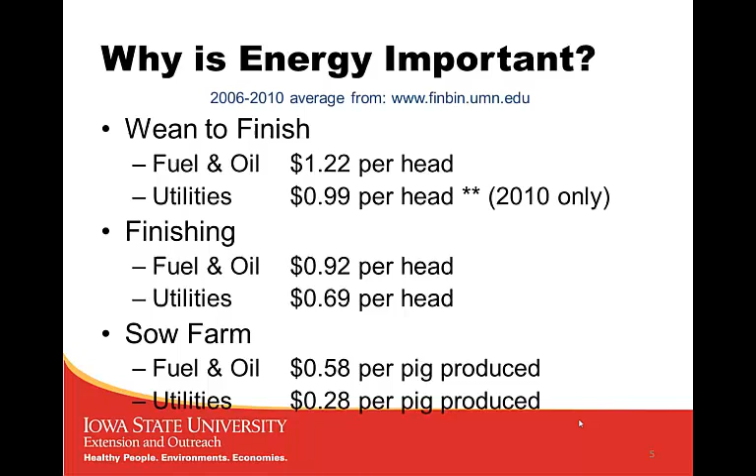So those numbers sound pretty small. So what's the big deal? Well, if you start to think about it in terms of what you can do something about, for instance, in a wean to finish, the energy or utilities is about $2.21 per pig. Well, that's only 2.3% of the total expenses, but it's 8% of the non-feed expenses. And so you get to thinking about it, and non-feed, well, feed is something you can't do a lot about. I mean, you need feed. You can't just say, well, I'm going to save money, I'm going to cut back how much I feed them. And so maybe we look at it from that aspect. That also maybe is a better situation for contract producers. You kind of see where that fits in with what you're paying for.

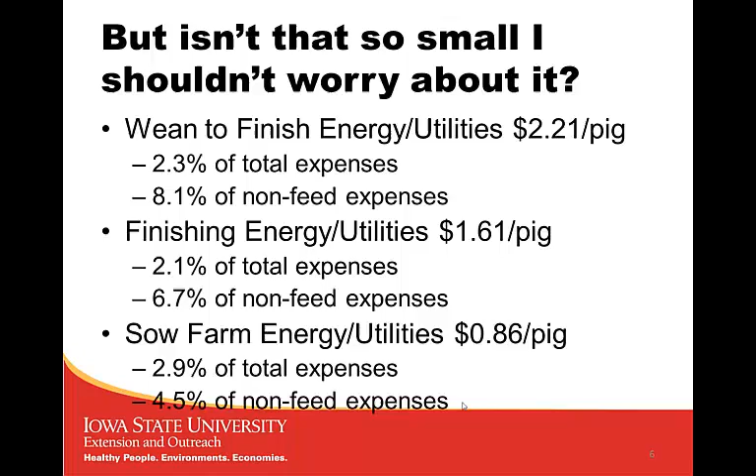And so, it's a significant amount, and it's something that you can do something about. And so, 8% for wean to finish. Sow farm is only 4.5% of the non-feed expenses, but it's still something that we can influence. It's money that we're losing out of our pocket. So let's take advantage of that and do the best we can to conserve it. So, like I said, it's something you can do something about, and many times there are energy savings things that we can do that don't really cost us anything. There's no investment, so that means the payback, rather than 2 years, is essentially instantaneous, and so they're more management related. So I'll try to cover several of those today.

So if we look at annual benchmarks, if you're going to know when you're saving energy, you really need to know how much you're using. So if you're not currently tracking your energy usage, I'd urge you to do that. These are Iowa numbers, and so your numbers will be a little different because your climate's different than what we have here in Iowa. For sow farms, and some of these come from Missouri as well, they were using 240 to 300 kilowatt hours per sow per year. LP, they were using 2 to 3 gallons per sow. Wean to finish, they vary a lot. If it's a tunnel building, 25 to 30 kilowatt hours per pig space per year, and that's per pig space rather than pig finished. For a tunnel versus a little lower for a curtain. You may be a little higher than that because your ventilation system operates at a higher level, probably more hours during the year.

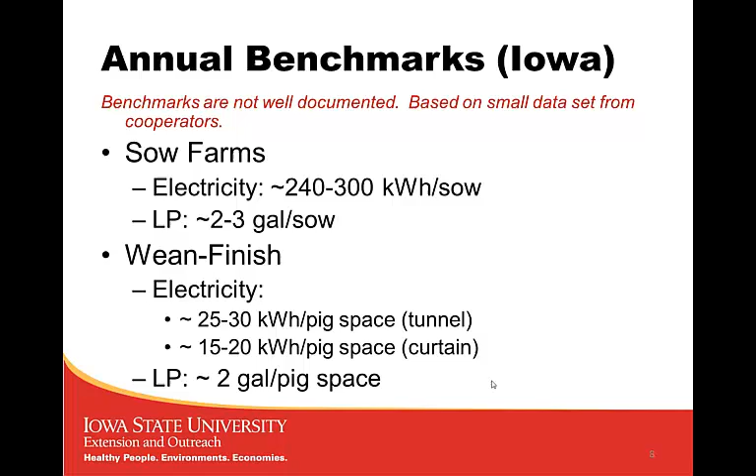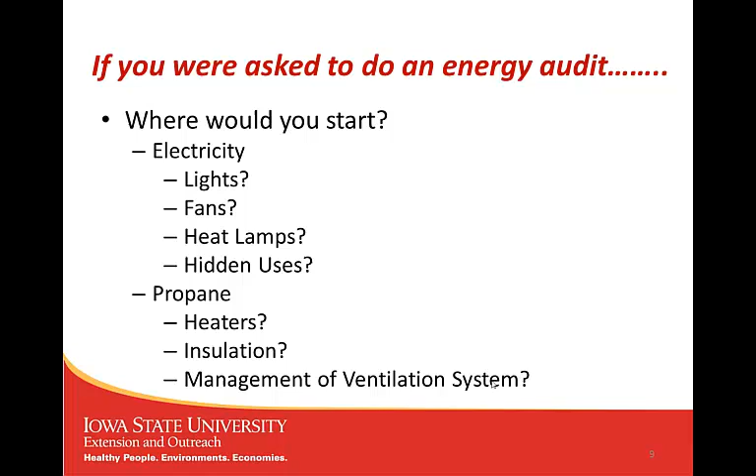So if you were asked to do an energy audit of your facilities, where would you start? Well, with electricity, you think about lights, you think about fans, heat lamps. What about some other hidden uses? With propane, you think about heaters. What about insulation or just management of the ventilation system? And so all these things are things we can think about, but where do we start? Well, I'm going to try to touch on most of these today, and so we can kind of get a feel for what kind of magnitude they have and how important they are.

So let's start with insulation. Many people in their homes, if you have an energy audit in your home, a lot of times they'll focus on how much insulation you have in your attic, and is that appropriate for livestock? Well, most of the time, in fact, we lose 80 to 90% of our energy through ventilation. In your home, you're not really ventilating, and so insulation really helps reduce the total heat loss.

So we have to remember, with our livestock building, we're ventilating, we're losing a lot of heat through ventilation, and insulation only treats the wall portion of that. So we're really only treating that 10 to 20, maybe 30% of our heat loss, and so it's not quite as clear cut. And so what I've done, I've used weather data from Richmond, Virginia.

They have weather data that tells me how many hours is typical between 5-degree increments. For instance, between 85 and 90 degrees, how many hours per year is it typical that the temperature's within that range? And then I go through this exercise where I try to find kind of an average usage, and I end up using 50-pound pigs at 3 cubic feet per minute ventilation rate.

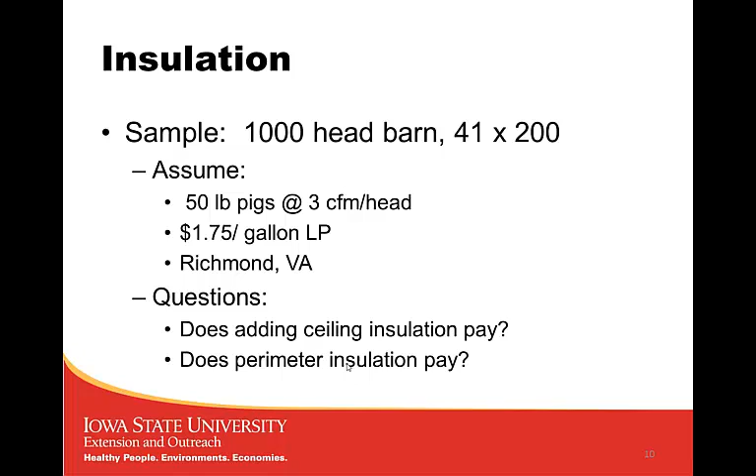So I go through this to find out how much insulation we would really need, or what the payback would be if we made some changes. Okay, and I used $1.75 a gallon for LP. I'm not sure what it is right now, but at the time that I put this together, that was pretty close.

So in this chart, in the left-hand column here, you see it says current insulation depth. So if you think about your attic in your barn, how deep is the insulation? Is it only 2 inches, or do you have 6 or 8 inches? Okay, so that's what this column represents. The center column then is if we decided to add 6 inches of insulation, so we blew in 6 more inches, what would be the savings per year?

And you can see that if we only started with 2 inches, we add 6 inches, so now we have 8 inches, there's a pretty good savings. However, the better insulated you are, the less the payback is. So it's sort of a diminishing return. And you can see here's the payback. This is based on some numbers I had for what it costs to blow in insulation. Maybe off a little bit, but you can at least see what the magnitude change is.

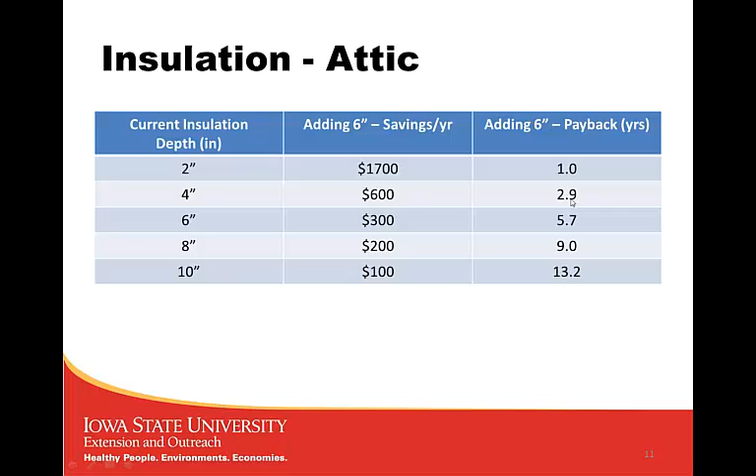And so what you see is that if you only have 2 inches to start with, within a year you can pay it back just with LP savings. But if you have 4 inches, it's going to take you 3 years, and so forth. And so if your existing building has less than 4 inches, maybe it's justified to put more insulation in. It would help building longevity and so forth.

But insulation is not usually the first place we start with our concern, like it would be with a house. And so I wanted to contrast that a little bit, because a lot of people, when they think energy savings, insulation is one of the places they jump to.

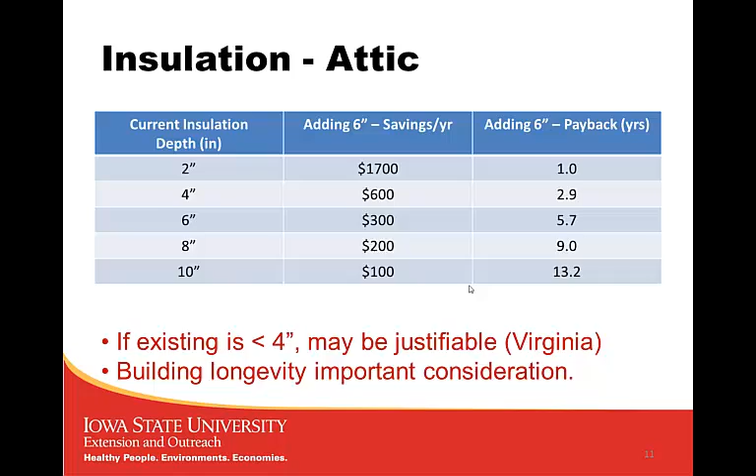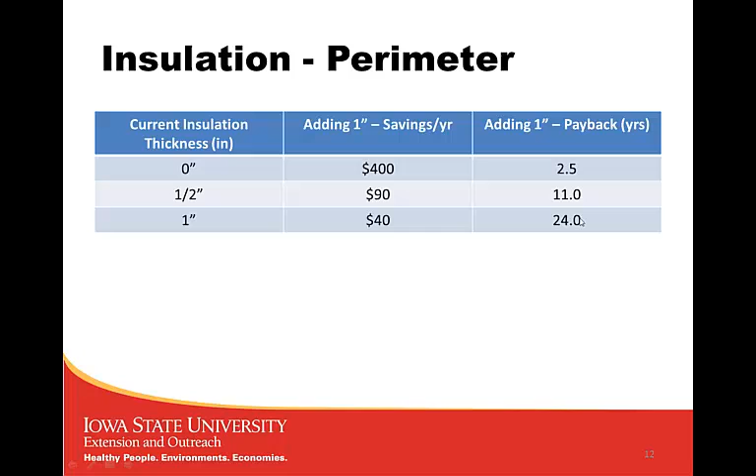If you have 1 inch, you're only going to save about $40 per year. If you add another inch, that'd be 24 year payback. So that wouldn't be very good at all. And so if there's no insulation, maybe you can justify it. It wouldn't be the place I would start, but there's some considerations from condensation and animal comfort, perhaps.

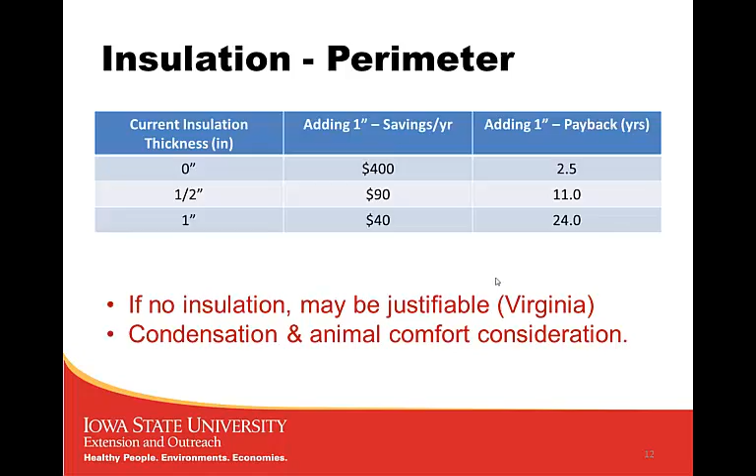Now again, because you're in a climate that's not quite as harsh a winter as what we have, I think that makes it even less of an opportunity than it might be for some other places. And so here I just wanted to illustrate this a little bit. Here's an uninsulated concrete wall. If it's 70 inside and 20 degrees outside, what's the situation? So 6 inches of concrete has an R of 1.33. So that's about what a pane of glass would be. Maybe a little better than a pane of glass, but not much better.

And so you have heat flowing from hot to cold, and the inside surface is about 44 degrees. So that means anytime in this situation the humidity is above 39% relative humidity, which in a livestock building is most of the time, you're going to get condensation. So in the wintertime, when it's cold, 20 degrees, you're going to have condensation around that lower part.

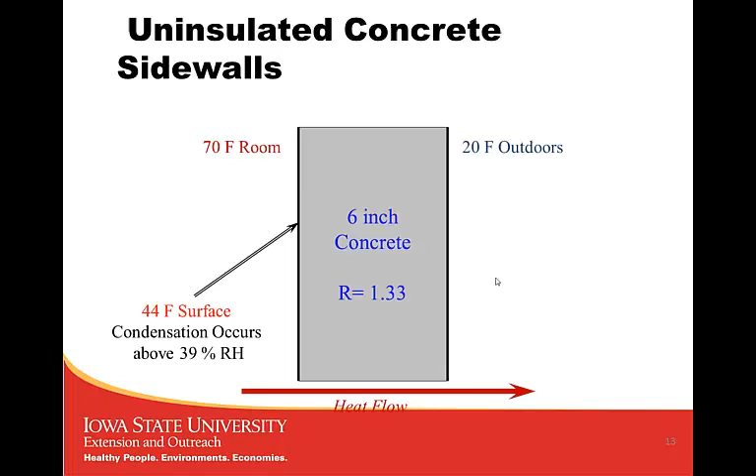If we went in and put 1 inch of insulation around it, now that R of 1.33 becomes 6.33. Insulation, I show pink board here, it can be blue board or whatever color you can come up with. A lot of those are about an R of 5 per inch, and it changes that inside surface temperature to 65. Now condensation doesn't happen until 84% relative humidity. So you can see there might be some pig comfort issues, there might be some condensation issues that you could save, but from a purely energy saving standpoint, probably not the place to start either. Okay?

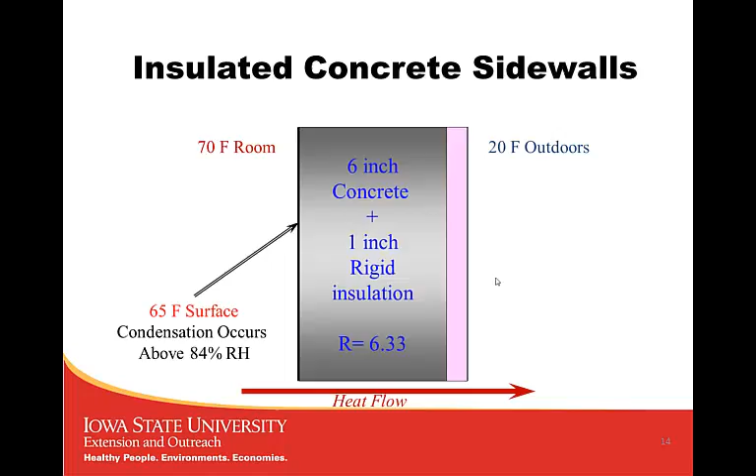I just wanted to show you this as well. This is some older data, but this is how being exposed to a cold wall affects pig comfort. You see on the left column air to wall gradient. So in other words, if the air was 70 degrees and the wall was 23 degrees below that, so that'd be 47, that's about what we came up with. Then it would make the pigs feel 13 degrees colder than that actual temperature.

Okay? So that's like you standing in front of a picture window in the wintertime. That window's cold. Even though your house is 70 degrees, you could feel like it was maybe only 57. Okay, 13 degrees colder. Effective temperature is the temperature you feel like it is. And so that's the influence those cold surfaces can have. All right.

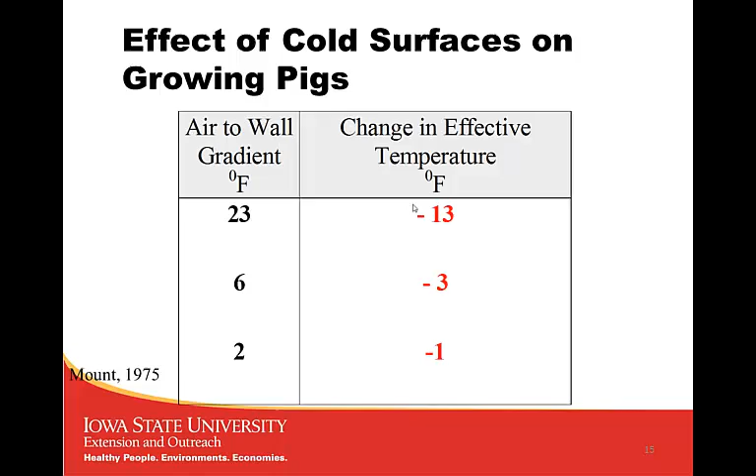So let's move on to some other things that might be a little more beneficial than insulation. First of all, let's talk about lighting. I know one of the speakers on the program is going to talk about lighting and LEDs, so I don't want to go too deep into that. I believe that person is much better versed at lighting than I would be, and so hopefully he'll have a good picture for you. But I just wanted to give you some background to think about with lighting.

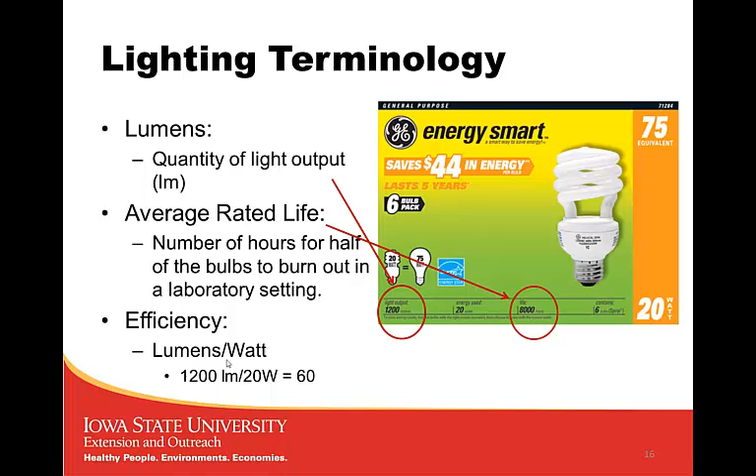Lumens is the quantity of light output. Most of the time that's labeled on the package itself. And then there's an average rated life, number of hours for half of the bulbs to burn out in the laboratory. So they put these in a lab, and when half of them have burned out, that's the life they set. And then the efficiency is the lumens divided by the number of watts. In this case that'd be 60. So that's a way to compare light, so you're comparing like things.

So this is sort of an overall chart. I'm not going to really go through this, but it is available at our Farm Energy website, and I'll give you that at the end. There's a lighting fact sheet that lists these, and we have incandescents here, although some of these incandescents they're phasing out, so they'll be harder and harder to find in the future. Compact fluorescents, cold cathode compact fluorescents, LEDs, and LEDs are advancing so quickly that this is likely a little out of date. And then there's different fluorescent lighting.

So I just show these as a comparison, and you can see the lumens per watt. Some of these are up in the 100 range, like LEDs and some of the T5 fluorescents, while incandescents were in the 10 to 35 range for most of them. Okay?

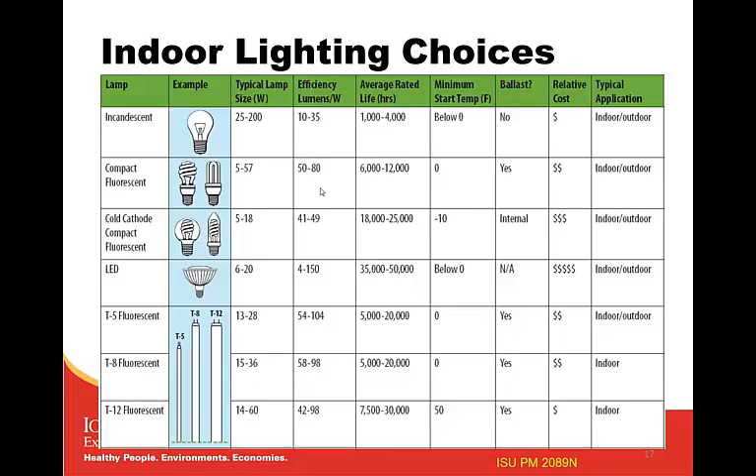So those are sort of your options. In a lot of times in the past, we've looked at incandescents versus compact fluorescents. It's an easy change, you screw in a different light for the most part.

And this was sort of the step that many people made a few years ago. LEDs have changed this perspective quite a bit, and like I said, the other speaker will be able to handle this much better than I am.

Now I have assumed, and I used half of that rated life. One of the issues with lighting changes is that many of the bulbs have a shorter life when they're in a globe. You have conduit and a light globe to protect the bulb, and because the heat builds up in there, many times it shortens the life of that bulb.

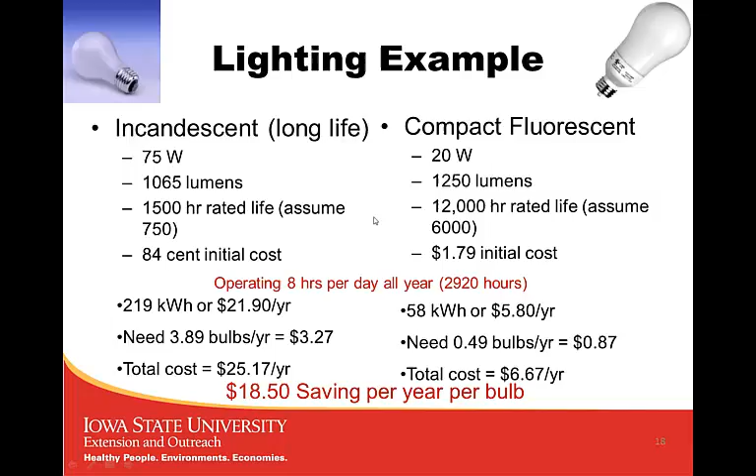Just as a magnitude of savings, for a 900 head gestation barn, for instance, if we had 150 bulbs in it that were on 8 hours a day, a 75 watt incandescent bulb would use almost 33,000 kilowatt hours per year, where 20 watt bulbs would use about a fourth of that. So there's a potential energy savings of $2,400.

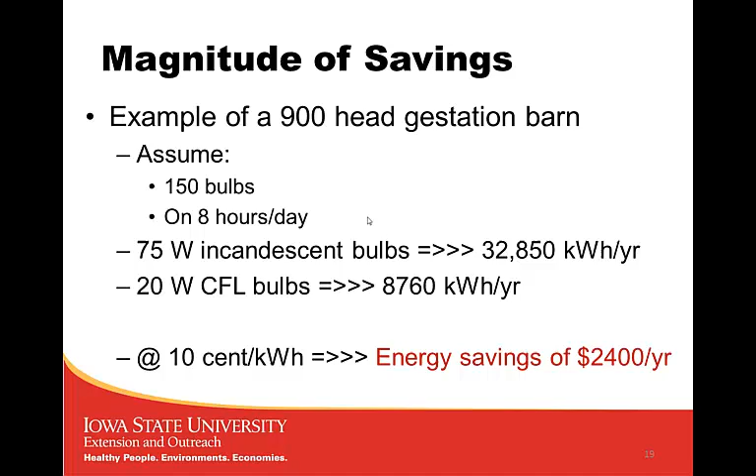Now, this is going by the lighting recommendation that Midwest Plan Service has for gestation barns. It's probably more bulbs than most people use, and probably more hours than some people use. But if you were breeding in that barn, you very well could have the lights on 8 hours a day. So I think some of these things we don't think about, lighting, we don't really think about it being a very big magnitude - but in a large barn, it certainly can be.

Ventilation - let's spend some time on that. That's really my bread and butter; I spend most of my time in extension working with ventilation. And it's far and away the biggest potential for wasted energy. Like I said before, 80 to 90% of the heating energy is lost through ventilation, and controller settings and fan selection have a big influence on energy, not only propane but electricity as well. So the next portion of this talk I'm going to spend on going through some of the ventilation issues.

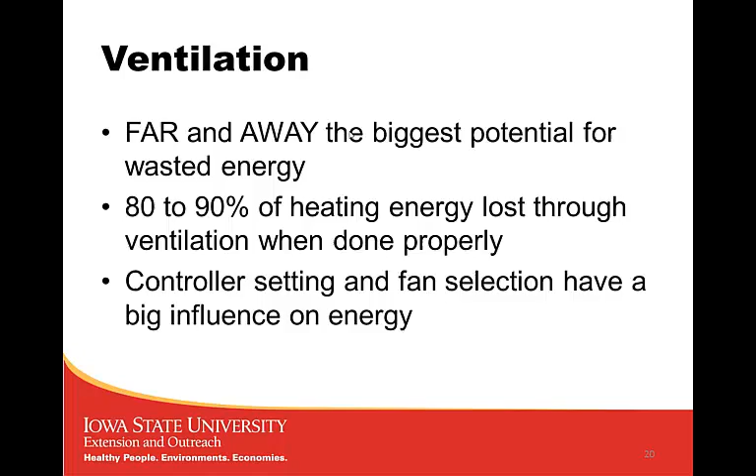So what about the proper ventilation rate? Well, again, I'm using the same kind of model that I developed.

I've compared it with some actual data, and it doesn't do too bad a job, so we can play what if with it. Let's use a 1,000 head barn, 41 by 200 roughly, and model 50-pound pigs at 3 CFM per pig.

With a set point of 68 degrees, that gives a general average. Now, one thing you have to realize is it makes a difference whether you're loading pigs in January or April. If you had a big system loading one group every week into a nursery or finisher, these average numbers might come out. But if you're loading pigs in January and somebody else is loading in May, you're going to get a lot different numbers. So this is just a baseline way to compare it.

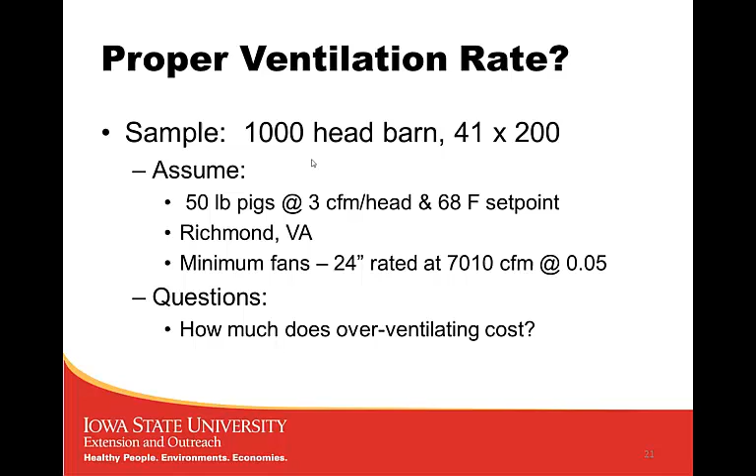Our minimum fans, we'll say, are 24-inch fans rated at about 7,000 CFM. So how much does it cost to overventilate? Many times people overventilate and don't even realize it. If that one fan is set at 50%, meaning it's actually moving 50% of its rating, then we're going to use about 170 gallons of LP per 1,000 pigs.

So that far blue bar, this is sort of what our goal would be. It's really not that much for your systems in comparison to ours. We're using almost 2 gallons per head. In this case, this would be closer to about 0.2 gallons, about a quarter.

Just a 5% difference, so this is 10% overventilating, now we go from about 170 up to about 210 gallons. Still not a lot, but it's quite the difference. Looking at 20% overventilating, which would be the equivalent of 60% of this 24-inch fan rather than 50%, now we're at about 350. So we've almost doubled our energy usage, our propane usage, with a 10% change in the setting on our fan.

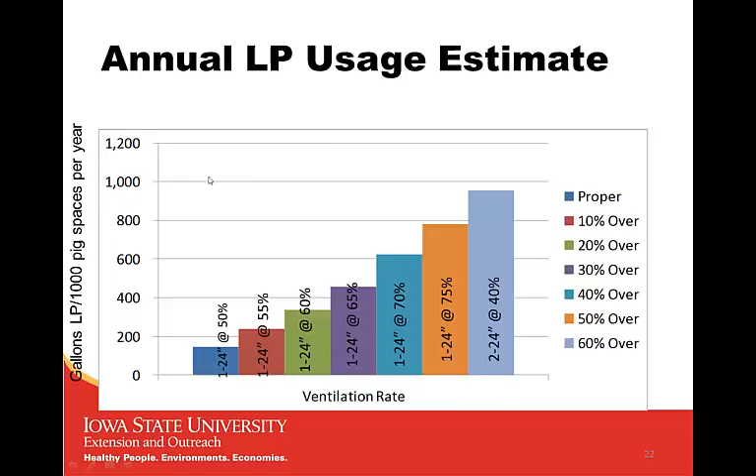We want to ventilate enough to keep good air quality, but not so much that we're wasting energy. Variable speed fans make it difficult because we don't really know how much they're moving. The poultry industry, most of the time, uses large fans, but their buildings are so large that they can just bring them on one at a time, and they don't fool with variable speed in most cases. So why do we use them?

Here's an example. If you have a 24 crate farrowing house, minimum ventilation is 20 CFM per crate, so that's 480 CFM. The smallest fan available is 1,000 CFM. So we use variable speed to cut that in half, essentially, to provide that minimum ventilation.

For a 1,000 head wean-to-finish barn, usually you start pigs off about 2 CFM per head, so that's 2,000 CFM. A 24-inch fan is 6,000 CFM. In this case, a 24-inch fan really can't slow down enough to do 2,000 CFM. Many times people oversize those minimum fans, so really for a 1,000 head barn, we'd be better off using maybe 18-inch fans or something smaller.

Normally, a good rule of thumb is, for instance, if we need 2,000 CFM, we wouldn't want a fan that was more than twice that size. In other words, a 4,000 CFM fan can be slowed down enough to provide 2,000 CFM, but a 6,000 CFM fan really can't be slowed down enough to get to that 2,000. So many times fans are oversized, but the point is, we need variable speed to be able to get there.

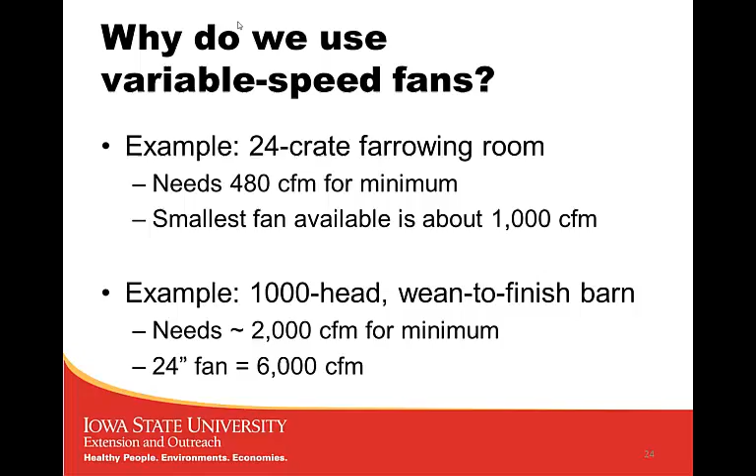This is another tricky aspect: here you have the voltages on a specific fan, and you can see this top red line is full voltage. At a static pressure of 0.1, we're delivering about 7,000 CFM. At half voltage, so 120 volts, we're only delivering about 800 or 900 CFM.

Most of the time, if you put that in place and tried to run it that way, the wind would blow against it, and it would not be a good situation. You couldn't count on that ventilation, so this isn't a linear system. Really the only way to do this is to start off the ventilation system by setting it. Let's say you had an 18-inch fan that did move the 4,000 CFM we were talking about. Start it off at 50%.

See how the air quality is, and adjust it based on air quality. If the air quality is not good enough, tweak it up—maybe change the setting to 55%. If it's still pretty good, and you think maybe you're using a little extra propane, you need to tweak it down a little bit. So it's a little bit of an art.

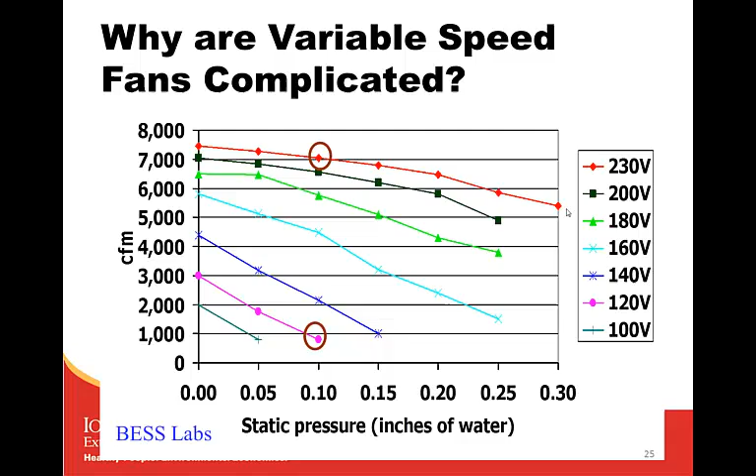Here's some example data from a fan, and this comes from BESS Lab—a testing lab at the University of Illinois. It's online, you can look up all kinds of fans on here, and I'd really urge you to do that if you want to know more about different types of fans.

That's a way you can compare from an energy standpoint—how this fan compares energy usage-wise to other fans. In fact, the lab was started as part of an energy program years ago just to do that evaluation on fans.

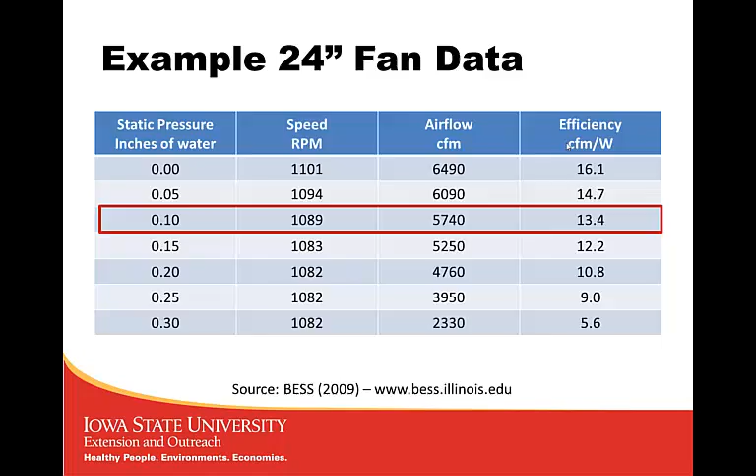And you can see as fans get larger, they get more efficient. Some of them are belt-driven and so forth, and so the efficiency goes up as the fan size goes up.

So to say, 'well, I want everything above 20'—it'd be pretty difficult to get a small fan with a rating of 20 CFM per watt. So you'd want a kind of moving scale depending on the fan size you're talking about. This might be a decent way to approach that.

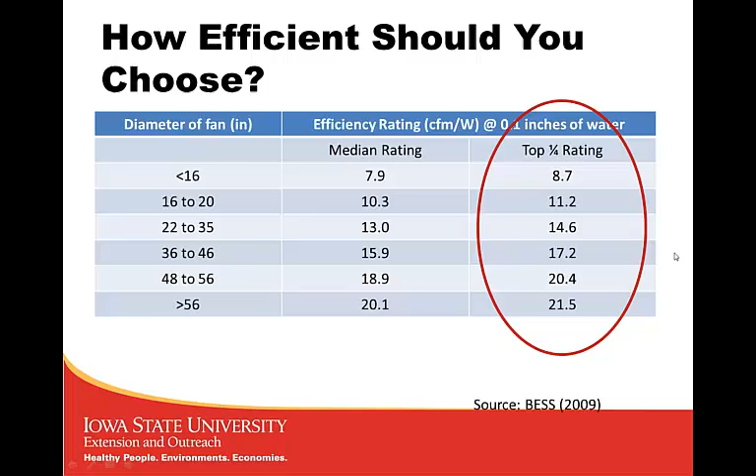If we want to compare—I set this up for a tunnel building, wean-to-finish, so they have a lot of tunnel fans. 120 CFM per head is the top end where you'd probably be. I set it up with two fans at about 4,000 CFM each, one fan at 6,000 to 7,000, one fan at 10,000, and then four other fans.

If I pick the most efficient fans for a system, I'd spend roughly $1,300 if the price of electricity was 10 cents per kilowatt hour—about $1,300. If I chose the least efficient ones, I'd spend about $2,300. So each year I could save $1,000 just by picking the most efficient fans in this case. Again, that's kind of annualized—it depends on when you load the pigs, but you could save more than that in some cases, less in others.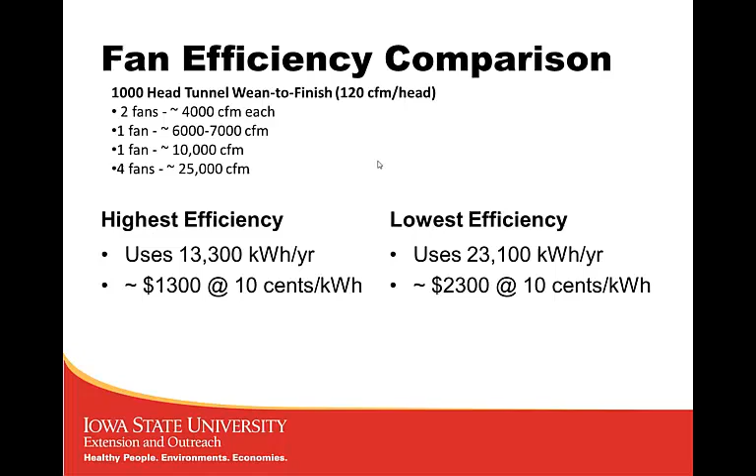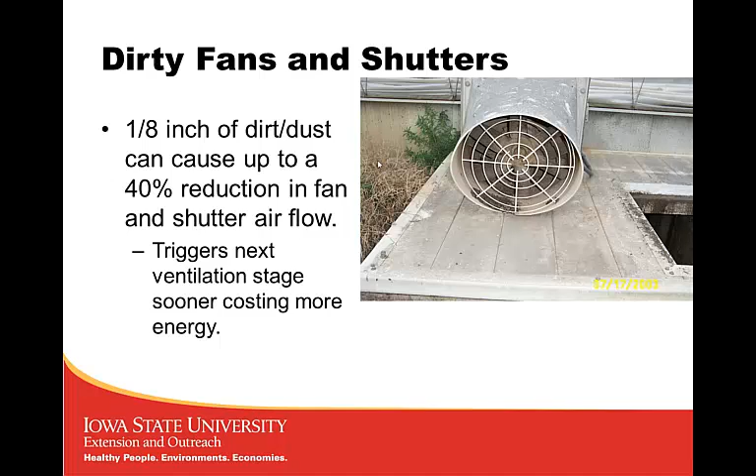Fan maintenance is very important. A fan that's dirty can move as much as 40% less air. The shutters get clogged and don't open as far as they should, and fans just get dirty with junk in them. Cleaning and maintaining fans is important, because when a fan moves less than it should, it'll trigger the next stage of fan to turn on more quickly.

What about proper temperature? How can you tell if you're at the proper temperature, and how much does using an improper temperature cost?

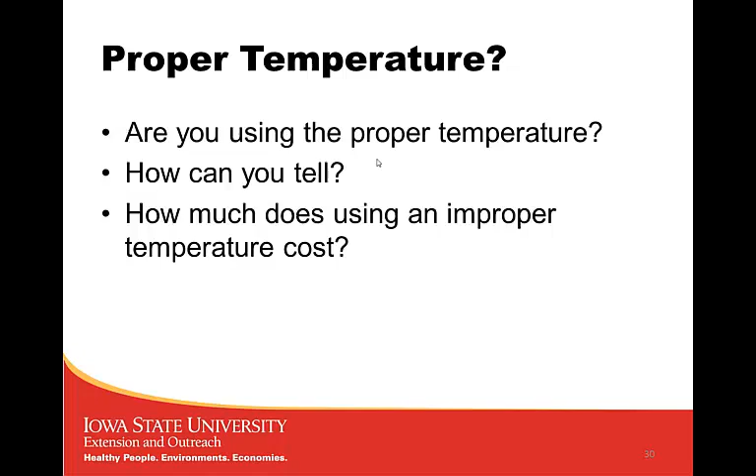Here we have a 1,000 head curtain-sided building with 50-pound pigs in Virginia. At 68 degrees, which I'm considering the baseline, we'd use about $260 worth of fuel. If we kept it 5 degrees warmer than we really need to, that would actually increase our LP usage by 310%.

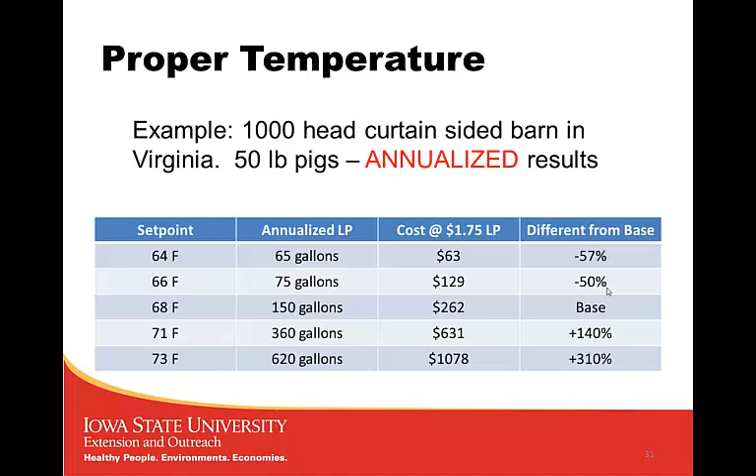Turning it down less than we need to, we can save half if we do it 2 degrees cooler. But there are other costs to that - the pigs might not perform as well, and so forth. Many times I'm in buildings where the temperature is too warm rather than not warm enough, so paying close attention to this is important.

Watching their behavior is one of the biggest keys. From an experiment we did a few years ago with pigs at different temperatures - I don't remember the exact temperatures - you can see these pigs huddled because they were cold. These pigs laid out touching each other; pigs are pretty social animals, so they tend to touch each other when comfortable. These pigs were probably too warm and didn't touch each other much because of how they lay. Now, the other conclusion you could draw is that white pigs are less friendly than black pigs, but that's just the way the trial went.

Watching your pigs, observing how they move and lay, is valuable. If you can sneak into the room without disturbing them, or look through a window, you can tell a lot about pig comfort just by watching how they lay.

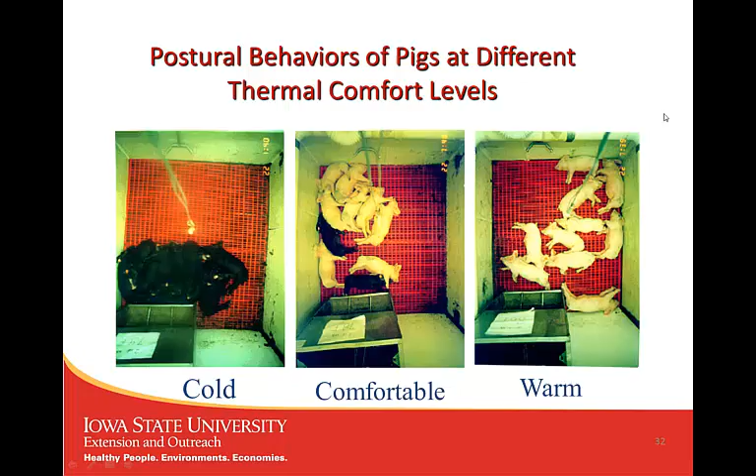Properly setting the heater and fan controls can make a big difference as well. Let's talk about that for a minute.

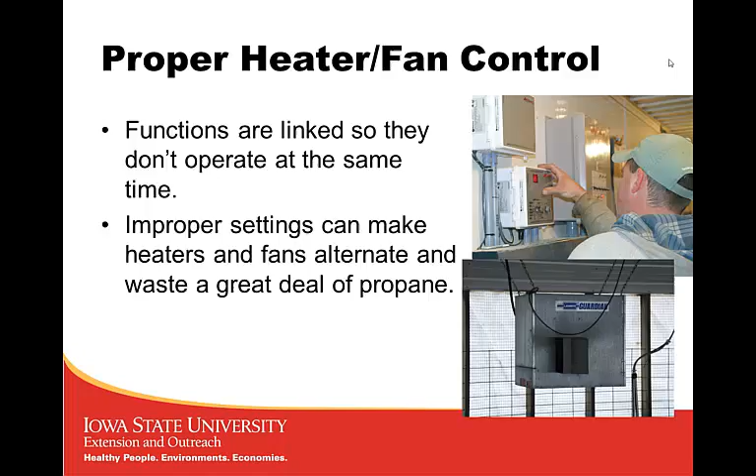This is the way a normal fan control works. At the set point, the first fan, the minimum speed variable speed fan, will start to increase speed above the set point. So we may be operating at some minimum percent, say 50%, and it ramps up to 100% over some bandwidth, perhaps 2 degrees.

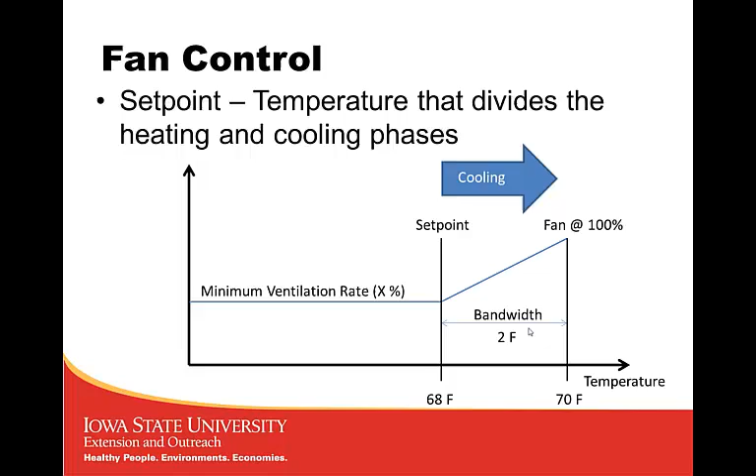That's considered cooling. The set point isn't the average room temperature, it's the trigger point for when cooling begins. For heater control, it works below the set point. As the temperature drops below the set point - in this case I'm showing 68 degrees - it reaches some point and the heater comes on.

It heats some amount; some controllers call it a differential, others just have you put in the heater off temperature, so it might heat about 1 degree. What happens is once the heater shuts off, sometimes the room will continue to get warmer, because sensors can respond more slowly, or sometimes you have a big heater in a small room - it just takes time for the heat to spread around. So once you turn the heat off, it'll continue to go up a little bit.

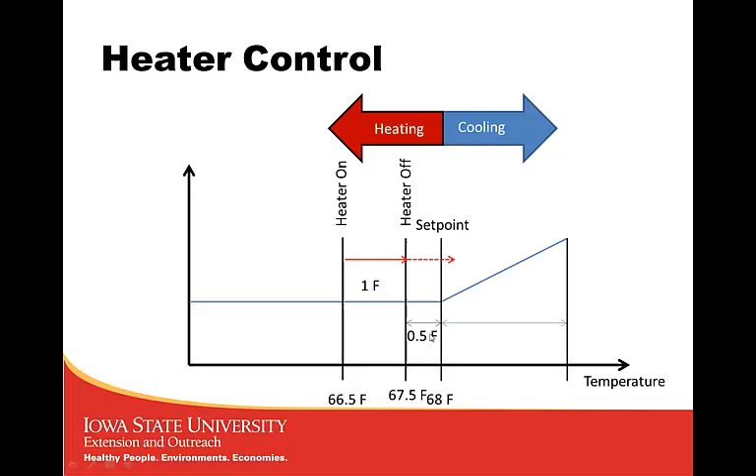In the winter time, if you're in heating mode, most of the time it should be below the set point. What can happen is if this differential is too small - say 0.5 degree - you can overshoot it. So you overshoot the set point, the heater runs, shuts off, and then you hear the fans start to ramp up and increase speed.

And so that's one thing I listen for in a building, is that if I go in, I hear the heater run and then shut off, and then I hear the fans start to ramp up, that means they're fighting each other. And so we're putting this heat in the building, and then right away the fans turn on to exhaust it. And so that means this offset is too small. We're turning the heaters off too close to the set point.

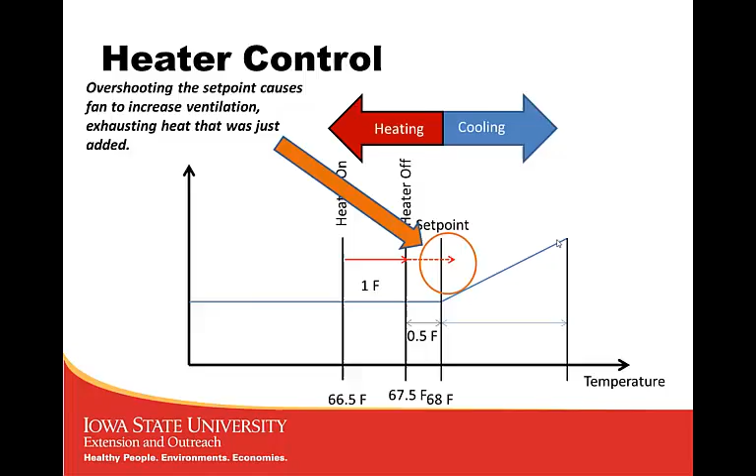So in this case, the heater was coming on 2 degrees below the set point and turning off 1 degree below. Then they changed it to 2 degrees below the set point. It would turn on and turn off 1.5 degrees below. So in other words, it only heated the room 0.5 degree and then turned off. It's only a 0.5 degree difference. And then suddenly the heater stopped running. Just that 0.5 degree. And so what was happening was the furnace and the fans were cycling back and forth.

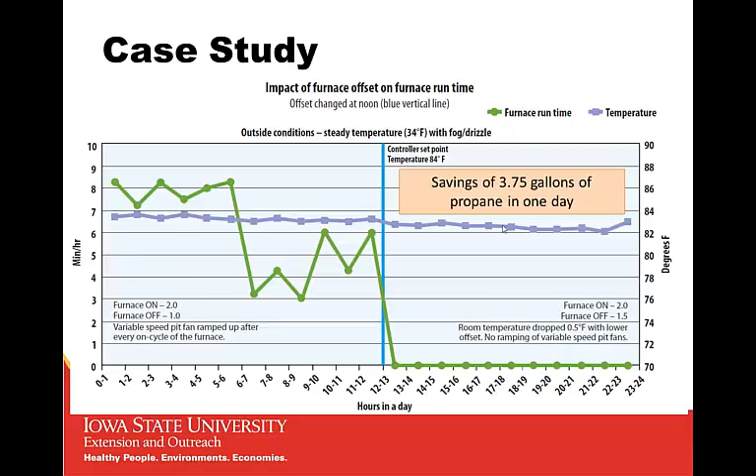They saved 3 3/4 gallons of propane in one day just by changing that 0.5 degree. Okay, again, they're in a colder climate, but you certainly can save propane just by making sure that fighting between the heater and the fan doesn't occur. There's a fact sheet on this as well on our website that may be of interest to you.

Initially, I recommend they set offset. That's how many degrees below the set point the heater turns off, so that's the way you can remember that. It's 1.5 to 2 degrees, and then the offset needs to be larger in rooms where the furnace is large for the room size. But the most important thing is to listen to see, does the furnace run, and then do the fans increase. Those should never be occurring in close proximity.

It could be you'll hear the furnace cycle in the morning, and then maybe at noon it quits running and doesn't cycle, and then maybe in the afternoon it gets warm enough that the fans start to increase speed and start to ventilate a little more. But you should never have the heater run and then the fans increase in proximity to each other.

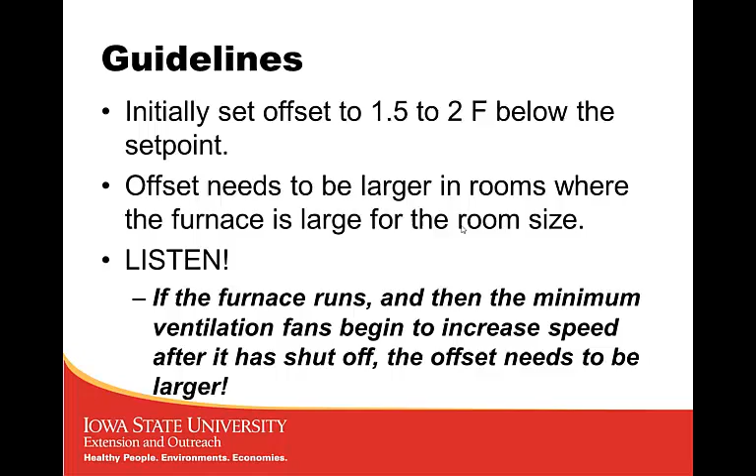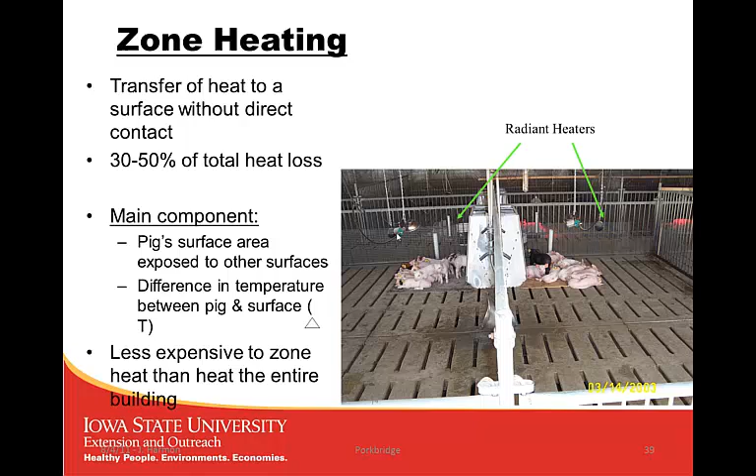And so what we do is we're able to keep the room temperature cooler, use less heat that way, and just provide kind of a zone where they're more comfortable. And so we're trying to take advantage of that. So the benefit comes in lowering the room temperature. That's what we're trying to do. We're trying to save energy, propane. And so without lowering the room temperature, it's kind of pointless. Okay? So let's look at this a little bit.

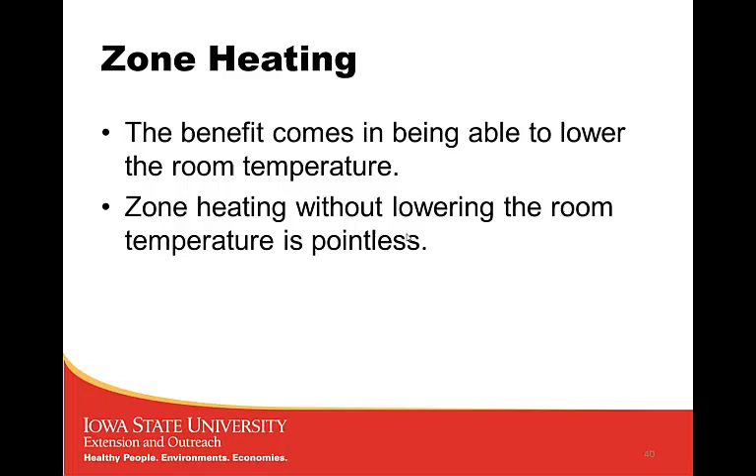The controller settings on this can be very important. And so here I show that a brooder set point might be 82 degrees. And in many cases, many people set the room set point at 68. So they say, well, I want to keep my room colder, so I'm going to set my set point at 68 degrees. And these are heater settings down here then, okay? Space heaters.

Well, what happens is that if you have kind of a warm day, your heaters, even when they're on low or just on idle, are producing some heat. So sometimes the room temperature begins to rise, in this case above 68 degrees. Well, if energy was free, we'd probably just maintain the room at 82. Okay? But we're trying to save energy.

By setting the room set point at 68, our ventilation starts to increase above that 68. So what that means is, even if the room starts to get a little warmer just because the day is warmer, we're exhausting that heat. So it acts like 68 is really where we want it. Well, that's not really the case, and it's sort of wasting some energy.

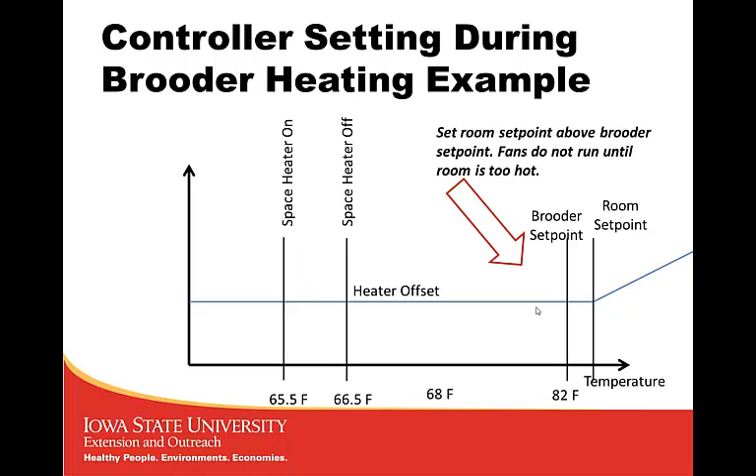All right, again, that's one of those fuzzy things. I'd rather be there because I could tell by the look on your faces whether it's soaking in or not, or if you have questions. But hopefully we can answer those via phone.

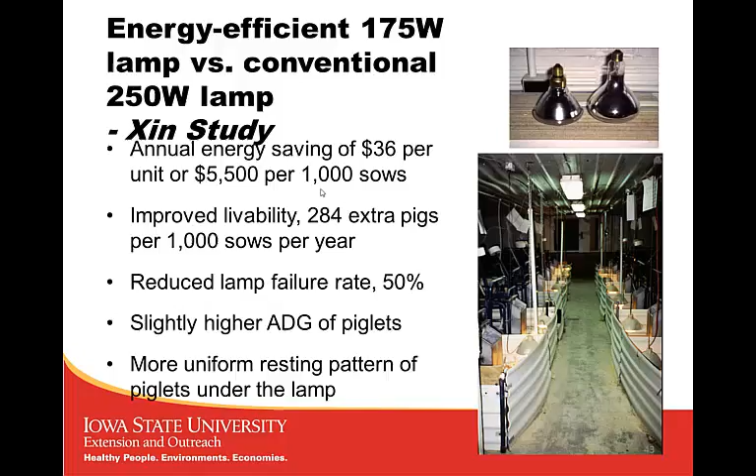This is just some brief data. Also, heat lamps in a farrowing barn. Dr. Xin in my department did this work quite a few years ago now, but he was comparing 175 watt to 250 watt bulbs. He had more pigs actually by using the small bulbs, plus he had reduced energy. And you might say, well, why did he get more pigs with smaller bulbs? Well, if we think about it, here's some pictures of how they lay.

And so with the 250 watt at 7 days, you see there's a place there where they're laying away from it. Here at 250 watt with 14 days, they're really laying away from it. So that means it's too hot right underneath, right? They kind of form a donut around that. Well, if they won't lay right under the lamp, where do they end up laying? They get up underneath the sow, right? So they were losing more pigs because it was too hot under the heat lamp. So with this lower wattage, they're filling in the space pretty well, and they didn't lose as many pigs.

And so that's the amazing thing to me, is even something as minor as the height or wattage of a heat lamp can make a difference on pig performance, how many pigs you wean. So maybe we should call that a game of inches, where even something so slight as that can salvage more pigs. That always just fascinates me, that something so insignificant can do it.

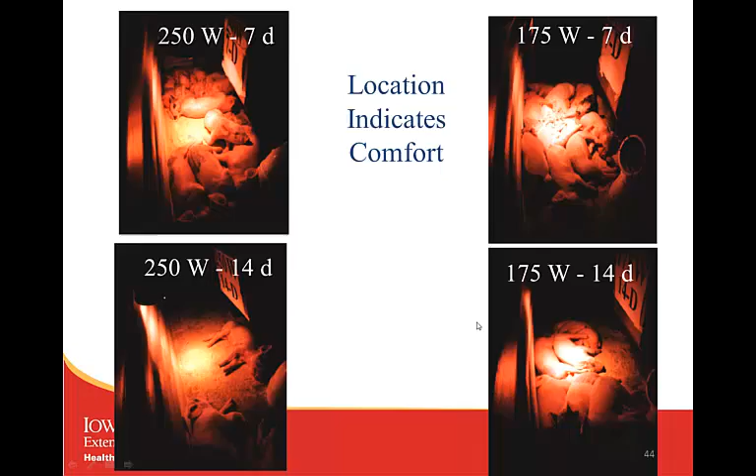This is another way some producers have done that. They also change the voltage that those bulbs receive, and so they can turn down the temperature to try to maintain it. Now, some people will try to do that with rheostats, but they chop the voltage and they don't really save any energy. Now, that doesn't mean that you're not providing a better environment for the pigs, but it doesn't really save the energy that you would with some kind of variable frequency controller.

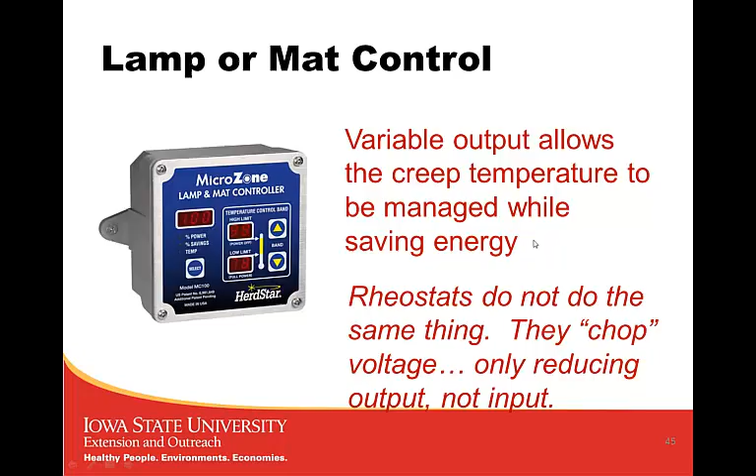Just a couple other management things to think about. If you have curtains, they should overlap at least 3 inches. That helps with leakage and helps ventilate better, keeps the cold air out, and can change how much heat you're using based on that. Sometimes there's pumps you're not thinking about. Could they be converted to 3-phase? Do the lines need to be clean? Those can use a fair amount of energy at times as well.

And then there's also emergency thermostat backups. Many times they're in buildings, and if they're not set properly, sometimes they can be turning on fans or heaters when we don't really want them to be on, and so it's important to keep up with them.

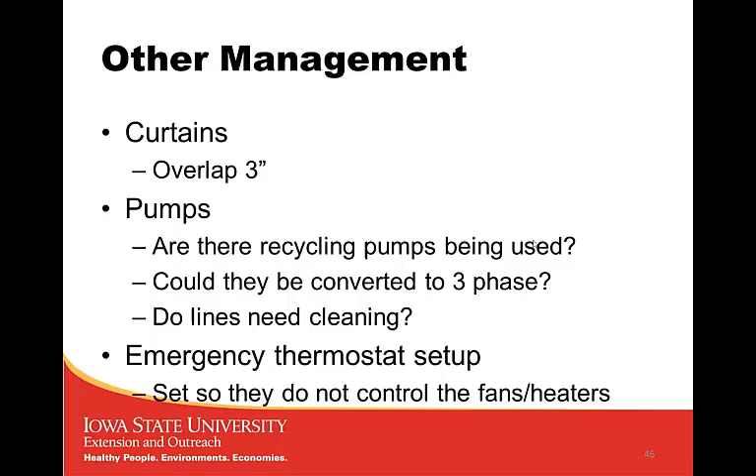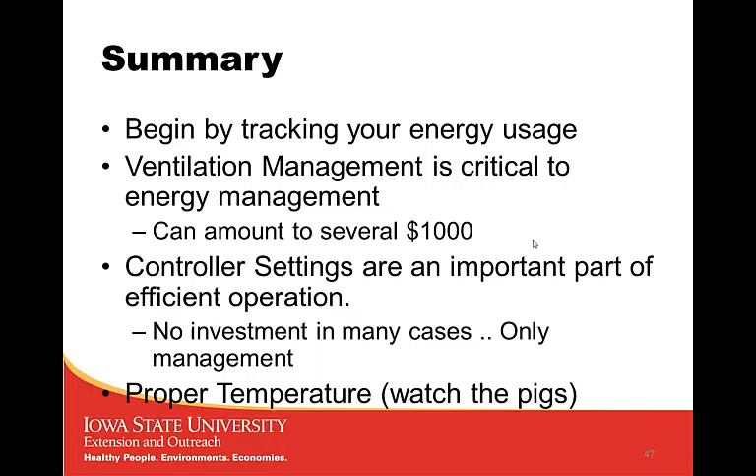Just a summary, few points here. Begin by tracking your energy usage. Ventilation management is critical to energy management. Controller settings are very important. Proper temperature is important. Insulation may be helpful, but in many cases it's not, and then lighting can actually pay back as well.